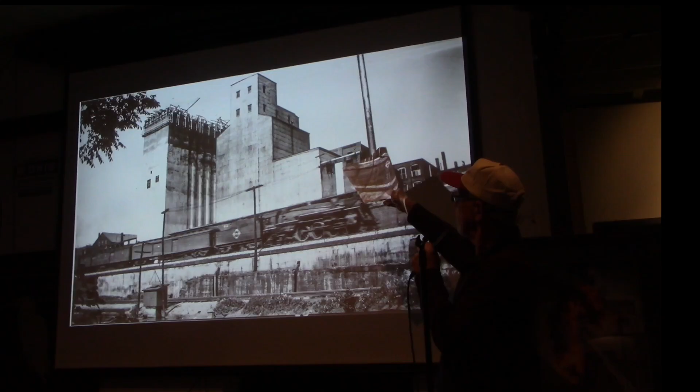Okay, so here's some historic photos. I love these photos. This is 1936. The crib elevator, the tall one over here, that was already built and added on to. That gave them 100,000 bushels of wheat storage in the crib. The concrete was built in 1936.

We have several slides of this. First I want to point out the railroad train is on the upper tracks, which was the Erie Railroad at the time, and you can see a little bit of the Erie logo right there.

Okay, so this is another one. They're still finishing that up there. You can see the cool cars. The Walters would have been over here, so I think it was there.

And there's a bowling alley. There's a big bowling alley. Oh, that's right, bowling pin alley. Yeah, that's right, that was there. That was the empty lot next to it.

And then there it is again in another phase. I just love this stuff.

So this was in 2001, I think. Star of the West had purchased us. We came up with a plan to repaint this, and the guys came in with high pressure washers, went all the way down, and we had paint chips all over the place, but they tried to plastic it all off, and they did a really nice job.

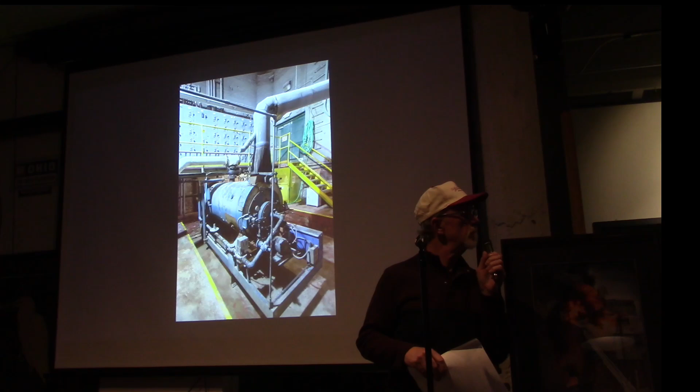Okay, this was the old boiler. This boiler was from the 20s or 30s, somewhere in there. It ran all the way up until we closed, into the 40s, yeah, we kept that thing running. The maintenance man, Darrell Bilby, was the maintenance man for a while, and he worked on it quite a bit, and Dennis Troutman towards the end kept it running until the very end when we shut the mill down in April.

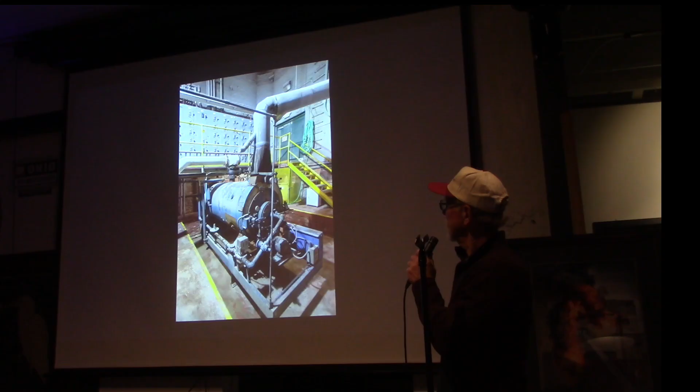Okay, we'll go to the next one. The big motor, in 1947, the steam engine was replaced.

Sorry, that just drops down on me. See, when I'm singing, I get loud. So, 1947, the steam engine was replaced with the big electric motor that powered the whole plant at the time.

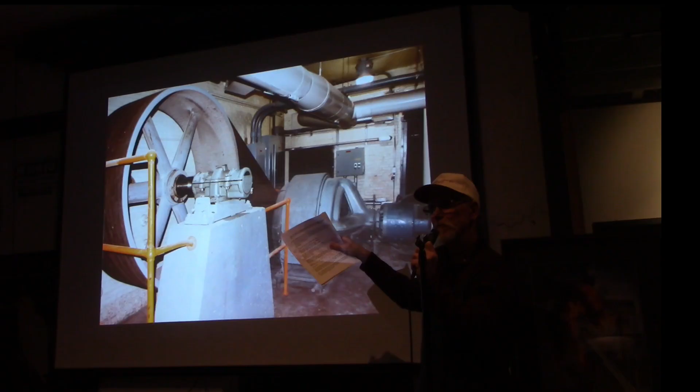Charlie Williams told me that when we started, you would start the mill up. The lights in the mill used to hang from cords, just light bulbs, really safe. So when the mill would start up, the lights would dim way down, and as the mill went, they'd flicker a little bit, then get a little brighter, and finally come up.

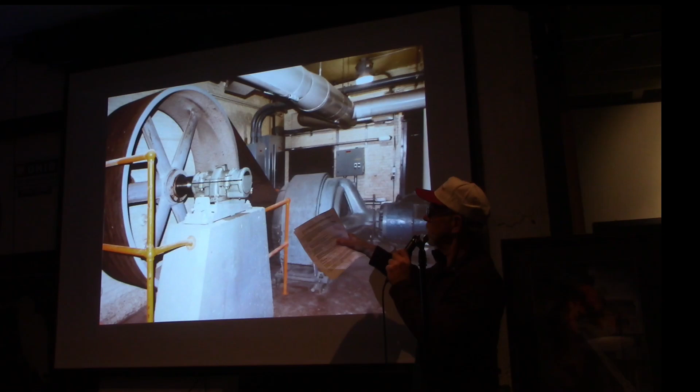Charlie Williams told me that at one time, in the wintertime, some of the guys would get a big board, or 4x4 or 6x6 or something, and they would use it to help start the mill in the winter because it was so hard to start. Now, what happened when we were there, one of those belts broke one time.

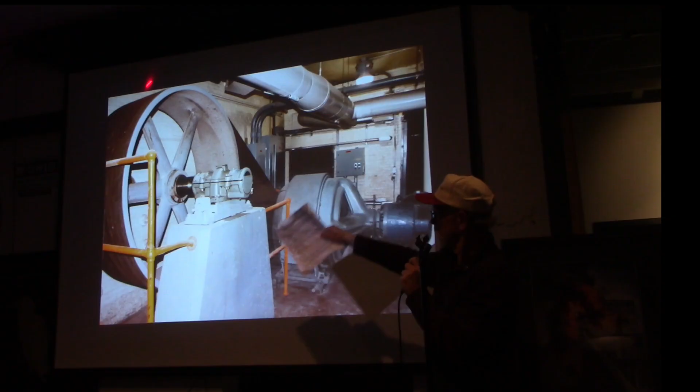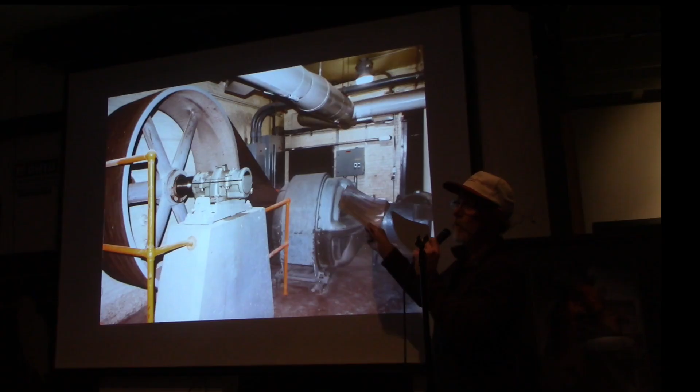There were 3 bars right there, and all 3 of them were in a V, and it pulled that right out of the wall. So after we replaced the belts, we went over all the belts and replaced them, and we put the railing back up. Guys would go up the steps like this, really quick, just in case.

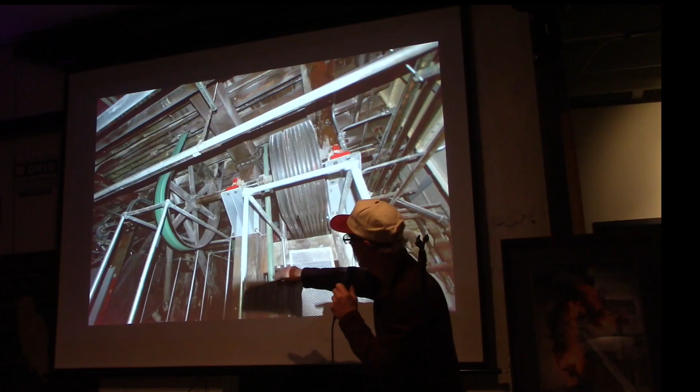This is a photo of the basement of the mill, some cool stuff, the belts. At one time there were some wooden spouts, and at one time all the spouts were wooden and lined with tin.

Good, next picture. So we're going to take you on a tour of the office and some of the interior sections. Should I move out of your way? No, sure. You guys, hi Ann!

Ann Stesney, everybody, let's give her a hand for coming. She was there for most of her life. Ann started out in the lab, and then she ended up as the office manager, and we worked together for quite a while. Yep, we worked right around there, right at the desk around the corner.

And you're in some pictures already, so. And Lou Lawson worked there for most of his life too.

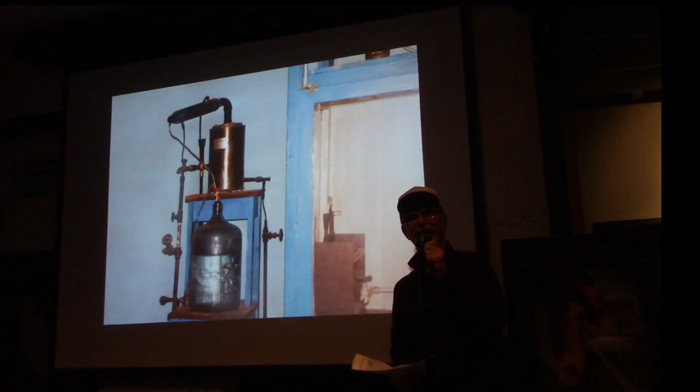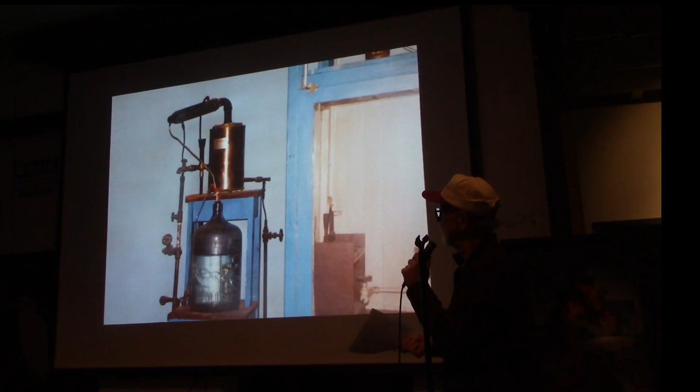Aha, the still. I always wanted to put some corn in there, but they wouldn't let me. We had this still forever. A lot of the tests in the early days used distilled water. All of our forklifts were battery-powered, and we would fill the batteries with that distilled water. That's still in the building.

You can see this pole right here, and the handle up on top. If you missed the step, or were asleep or something and didn't grab it, you could pull that handle, or hit that, and you wouldn't go over the top. Safety first. Okay, next, this is the one in the mill, and it had a similar setup, though it wasn't quite as daunting as the last one.

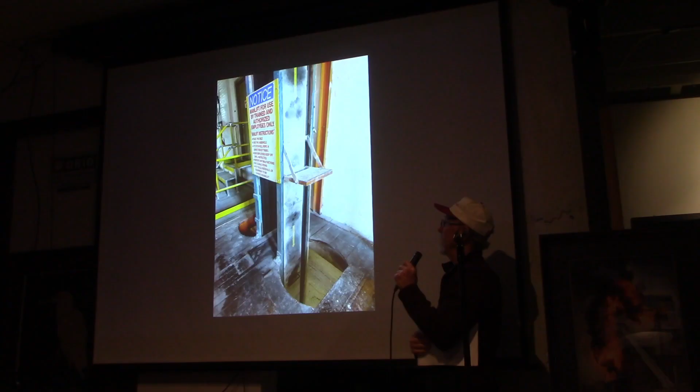The reason they put the cupped handles on was because at one time, at the mill, I don't remember what year, the night watchman had no lights on and was going up the other floor. As it came up, you'd have a handle, then a step, then a handle, no step, and it was down. The guy had his hand out like this, felt the handle, it was round, he jumped on, and they found him at the bottom the next morning. That was a horrible thing.

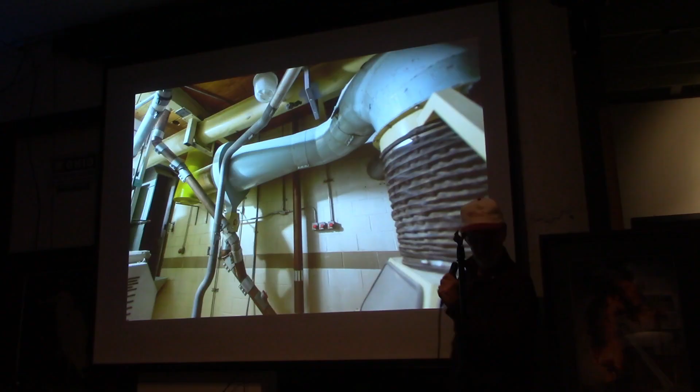So this is part of the cleaning house. Brad took this picture because of the design, I think. Yeah, going through the mill, I just found the appointments, the tubing, and everything so graphic and artistic, with different colors.

There was a movie years ago about a person that shrunk down to the size of a blood corpuscle, I forget the name, and you took a tour through the person's body that way. In the mill, I felt like that little person, because the mill looked like I was in a living being with all these tubes and stuff.

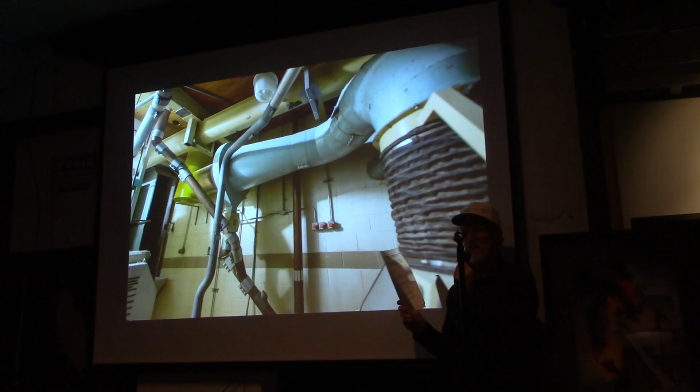The 60s was really good for Brad. Black lights, 4 foot long black lights.

Really good grain mills. The interesting thing about this cleaning house was the old cleaning house was in the crib, and it was old. We were always digging stuff out. So this part of the building was in between the back of the mill proper and the crib elevator.

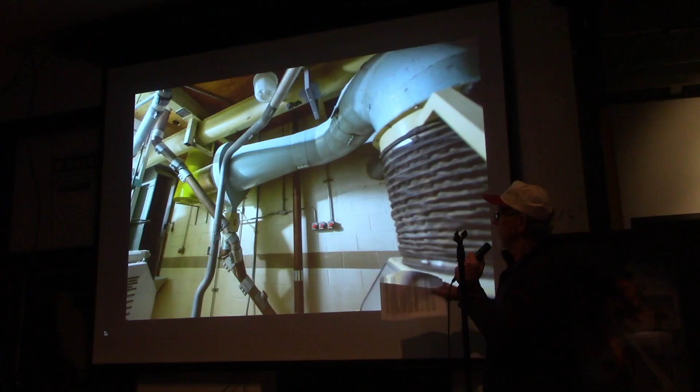So we built this wall. Ronnie Stamm and Stamm Construction did a monster job. They built this up, put in the flooring, and put all of this equipment over here.

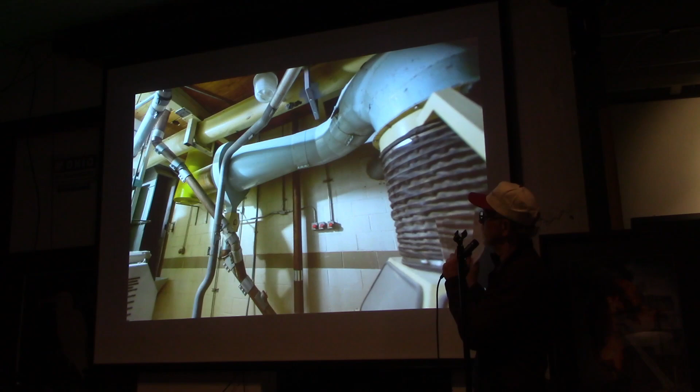Beer break. Are you in the flour stage now or the wheat stage? This is in the cleaning side of the wheat. Wheat stage, yeah, the cleaning side of the wheat.

Let's go to the next one. Okay, this is part of the cleaning house, just kind of a cool picture. These are air filters. Let's do one more, okay, just before beer, we'll get really thirsty on this.

So these were the roll stands when I first started. Were these in when you first started, Lou? No, they were already out. Okay, so these were the roll stands.

Inside the roll stand were glass doors, glass windows on them, and shaker tables. They were made of wood but had a tin covering over them, and were hanging from cables. Yep, Mike, they were hanging from cables, and they would shimmy like this. There was an eccentric bearing inside there, and they would shake like this.

On all of the roll stands at the time, and even still at the end of the run, on the line shafts, they were Babbitt bearings. Inside of the cast iron casing, we would pour them. When these Babbitt would go bad and the bearing would heat up, a couple of times on the roll stands, Roscoe Pownell, the old miller who was there for 55 plus years, would send us down.

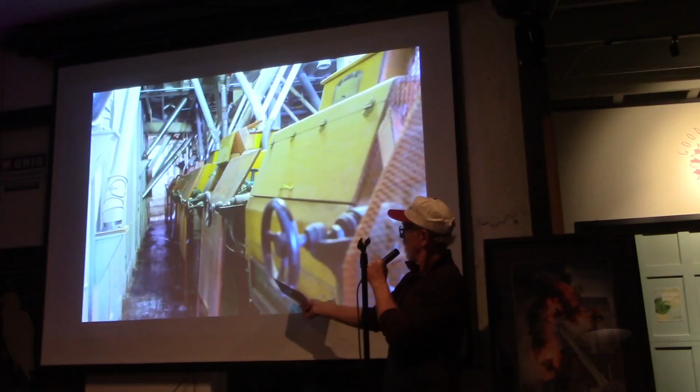So in the mid-'80s, we did a conversion. The bases of the roll stands stayed the same - those were Allis-Chalmers. And we brought these in, which are on roller bearings. It increased our efficiencies quite a bit, and it really turned out to be a nice job.

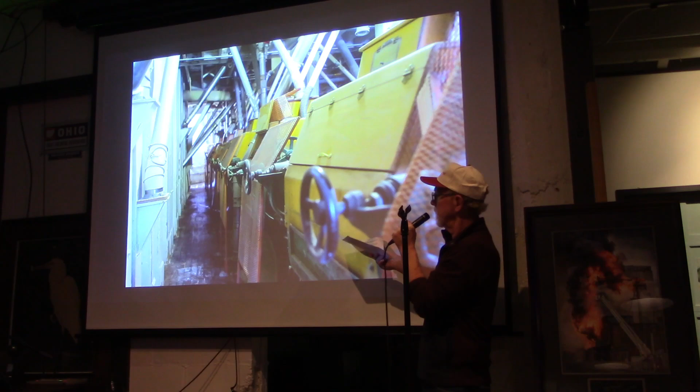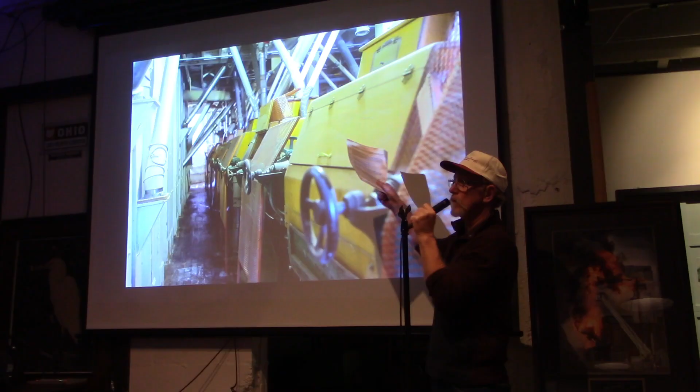Is that natural light coming down from above? Probably not, it was a mix - a lot of it is natural and artificial light. At this point, I think we had gotten rid of the tethered light bulbs, so there might have been LEDs at that point.

This is cool because you'll see later we took out the old sifters that were in there from the 1920s to the 1940s. We had these refurbished in our Ligonier, Indiana plant, and it took quite a few days to get this job done, but they were running.

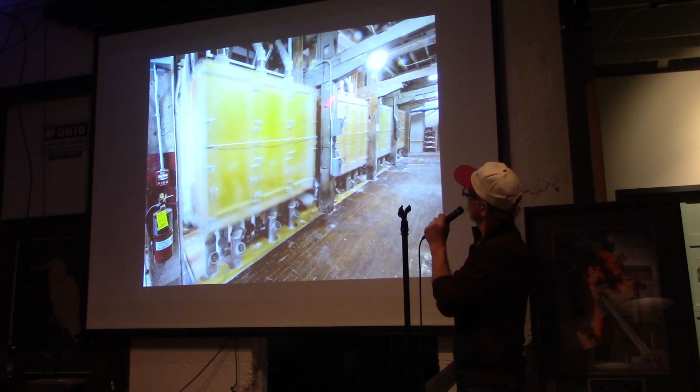Notice too, these beams are really big. What age would these be - 1890s? Those were 1890s, 1880s. These were original, we didn't take them out.

Some of the beams, if you look real close, you can see that they would bore a hole, and they weren't bolted together - they had a wooden peg. Yeah, all that was wooden peg.

Down at the bottom of the crib, under the bottom, where I'll show you a trash compactor soon, the beams up there were starting to crush down, so we had Ronnie Stom's crew come in and put up steel reinforcement.

Brad always came at the right time.

This was on occasion. Now you can see these are all aluminum pipe, and those were all wooden before. Behind them, these stands are the elevator legs, so inside of that is a belt with cups on it, and that brings the flour or the stock up and puts it to its respective place.

So we cleaned up a lot of that back in the day, didn't we, Lou? Yeah, yeah. And it was usually when it was 90 degrees outside and 105 in the mill.

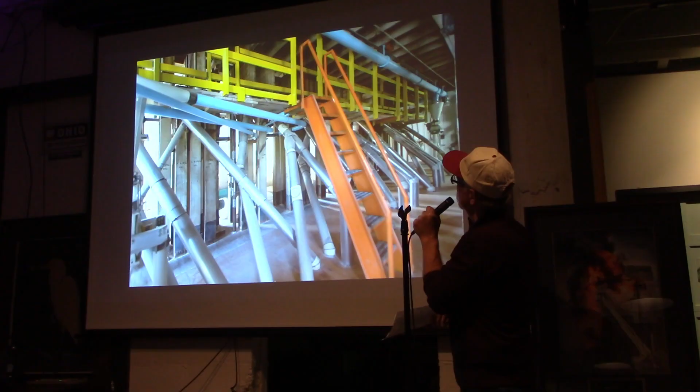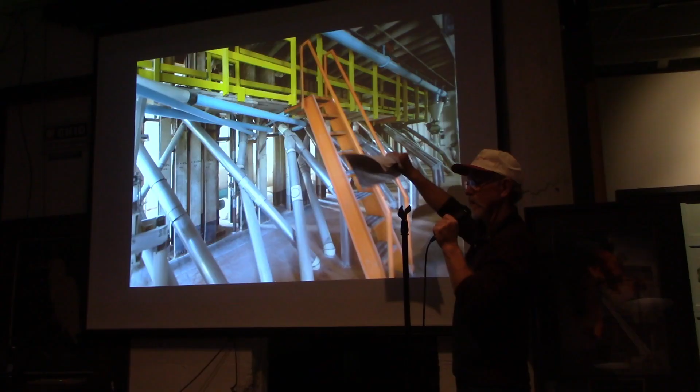This is up in the attic, or the 4th floor. The attic was called the attic because in the first pictures you saw, there was a hip roof in there with one window, and they called that the attic. After they added the 4th floor, the attic name stayed.

Those are another picture of the new sifters - this was the finished sifter. This little buddy handled all of the flour that was milled before it went into the storage bins. All of the flour before it goes into the storage bins goes through a sifter and a magnet, and it goes into the storage bin.

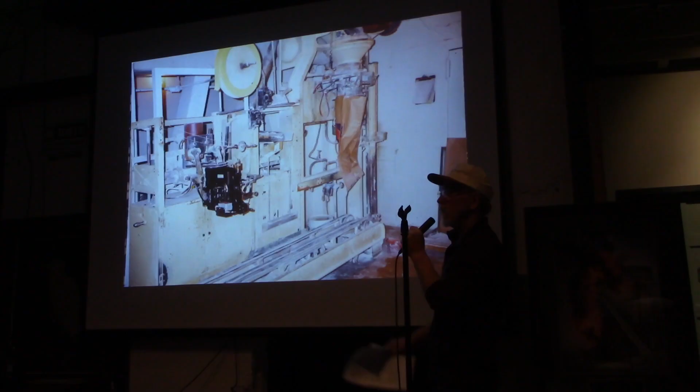Then coming out of the storage bins, it goes through a sifter and a magnet and goes into either a bulk truck, the bagging, or rail cars. Why is the magnet needed? Any kind of foreign metal, and there's a lot in the screws - the screws are metal, so you want to get rid of everything.

And so this was the original packer - this is a Bemis packer, and here are the Bemis hats that you used to get. They also supplied us in the early days with bags.

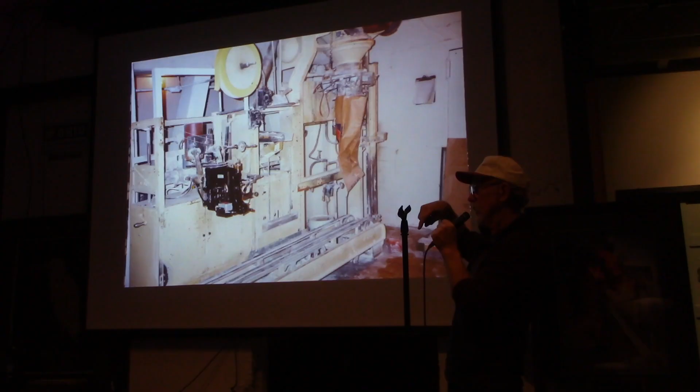What's the time frame of the flow there, through the mill - hours, days, from start to finish? To this point, from start to finish, it would be about 15 minutes. If it was... right? Impressive.

Tempering stuff would stretch out to hours. But just the grinding, from grinding, it was about 15 minutes to finished flour.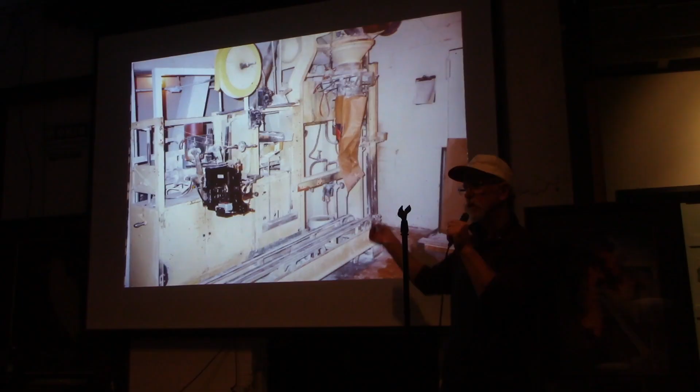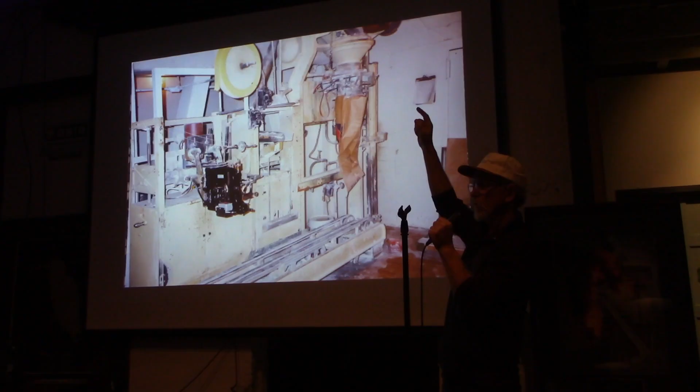It's moving through there. Everything that came through the mill would go to first break, down to the basement, up to the 4th floor, drop down through another sifter, or those other parts would go to their respective sifters. Goes back down, goes back up, goes back down, all the way to finished product.

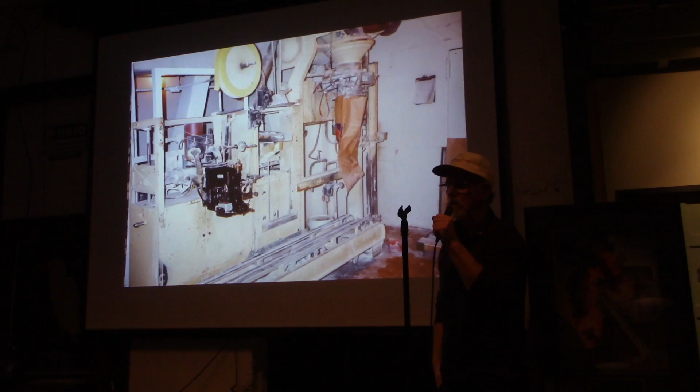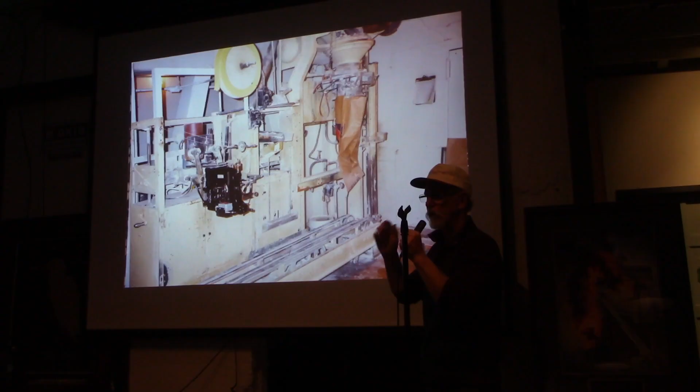Did it work 24 hours? Didn't when I first started. I was palletizing one time, and the bags were coming off of here, and we threw them off our shoulder and palletized them. We even hand wrapped them with a roll of stretch film in the early days.

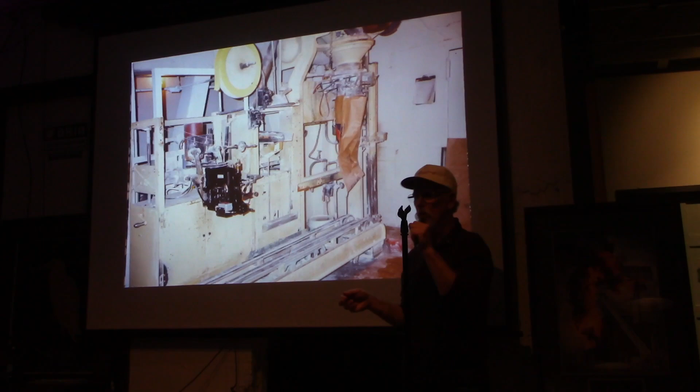Anyway, it was down, and the mill was picking up production. Pete had sold to Pepperidge Farms, and Sugar Cake Cookie was kicking our butt, so we were staying longer and longer. One day I was there, and he came down. I had just bought my Triumph motorcycle, a 650 Tiger, single carb with a lot of chrome.

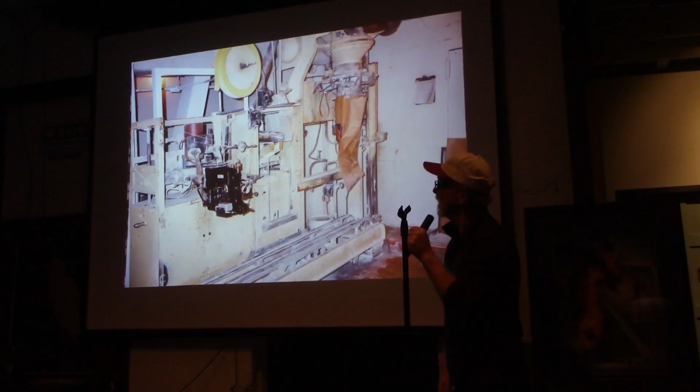He came down and said, 'Do you think you could stay for a couple more hours?' I said, we're just getting behind, we're getting behind, and it kept getting longer and longer. I said, 'Yeah, I got a bike payment, I'll stick around.' So yeah, we ended up running 7 days a week, 24 hours.

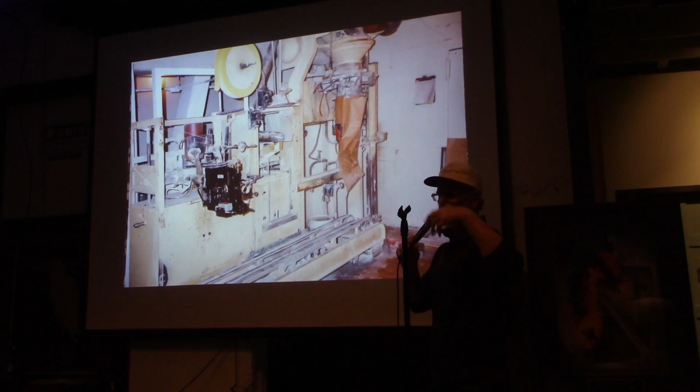At one point we were buying flour to cover some of our accounts and bringing it in, reprocessing it, blending it in with our flour just to cover accounts.

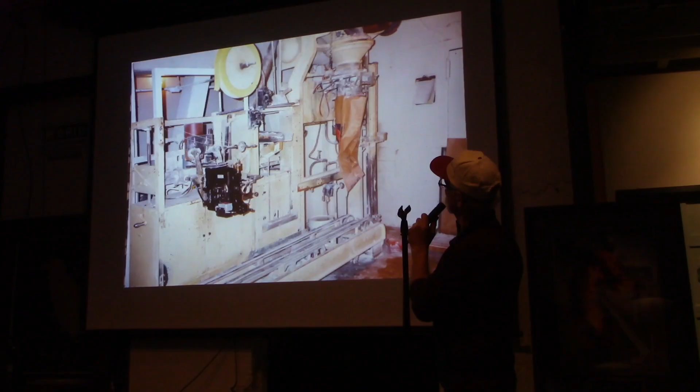So up on the top there is a bearing, and that's one of the bearings that was a Babbitt. There's a pan underneath it because they had an oiler, you had to oil them. Inside that Babbitt bearing, when we would pour those, we had Babbitt tools, real sharp, knife-like things. You would pull the Babbitt and make it nice and smooth. Then we'd take a Dremel or another tool and put an oil groove through that, so on the top and the bottom of that Babbitt bearing, when the oil hit and the shaft was turning, the oil would go back and forth and lubricate that bearing.

And they still use Babbitt in bearings today. It's a big user these days.

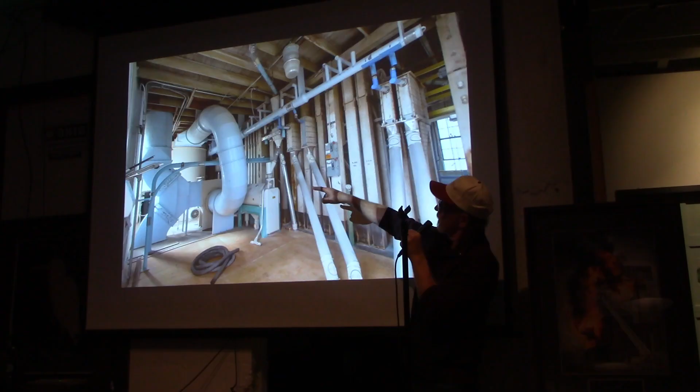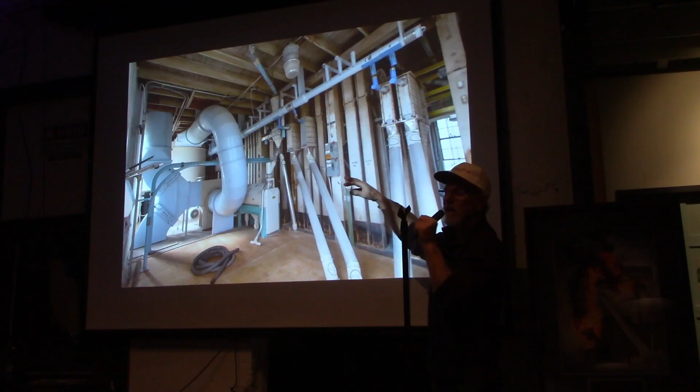And they're a lot bigger. They're a lot bigger than they look in the pictures. They are, they're huge. Yay, Brad. Next, good job.

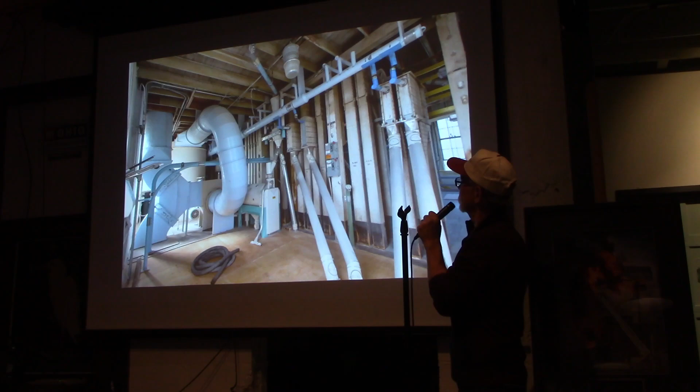Okay, at one time these are purifiers, and they're a type of sifter. They classify by particle size. Inside of them is a table that's slanted, and it's kind of shaken. It's got a screen on it. Underneath, there's a brush that goes back and forth, and they have these grooves in this thing, and this brush would go back and forth and knock the throughs off of the screen.

So they had 7 of these in the beginning. They went down to, we had 3 at the end, because we had added some other sifters and some other machinery that was more efficient. Next, back in the cleaning house again.

Tubes. Yep, my favorite, lots of tube pictures.

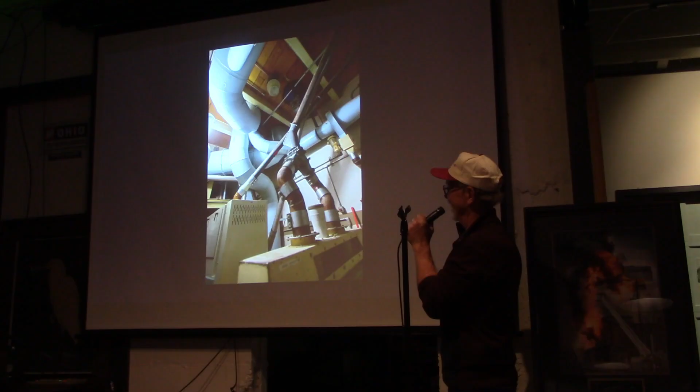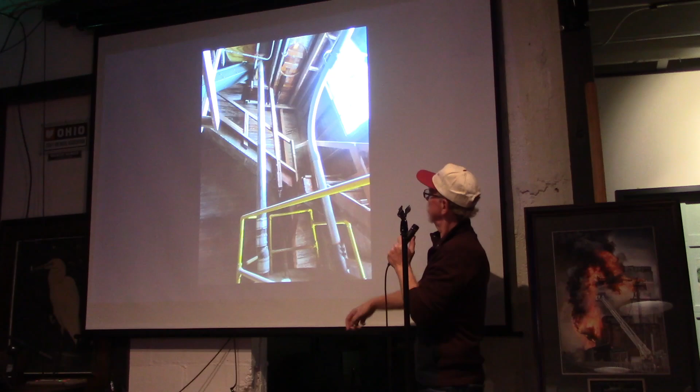Okay, this is in the crib. So down here was the packing bin, so we loaded flour into the packing bin. Down below it, on the first floor, was that packer, the Bemis packer that we packed out of. So you could go up all these steps, and it goes all the way up to the top. On most of the levels in the early '80s, when I was there, had big crocks. They were about 50-gallon crocks, 40-gallon crocks, and they were huge.

And the crocks, they had salt water in them in the old days. On top of the crocks were these red boards to keep the dust out. On top of those were pointy buckets, so that if they did have a fire up there, you'd grab a bucket and start throwing water on it before the fire. Because a lot of times in mills back in the day, they didn't really have the fire extinguishing that they needed.

Did this all burn in the 2022 fire? Oh yeah, this was that whole building. So all of what we've been looking at is gone, is that right? Correct, in this part, just in this part. It didn't affect the mill proper. I mean, there were some windows blown out, but it didn't burn anything terribly in the mill proper side. Just the crib, the crib elevator. And the crib elevator, well, we'll show pictures of that soon.

And the reason I took a lot of these pictures is just because of the really old wood. And it's really original, it's interesting to see really old wood still holding up, and you're able to walk on it. You just don't get that experience anymore, 100, 130-year-old wood.

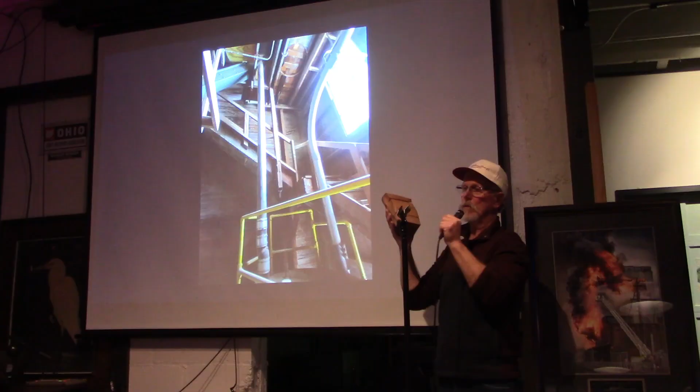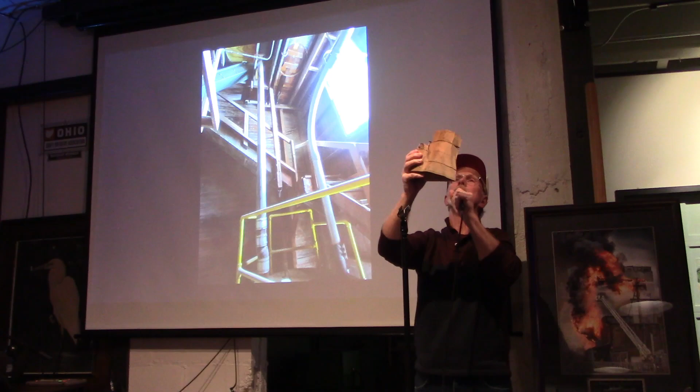Oh yeah, explain some of the grooves in these things. Okay, so the crib elevator was built with 2x10s laid flat, all the way up to the top of the bins, and then they went with siding on that. So I don't know if you can see it from the back, but this is rounded off, it's very smooth, there's no splinters. You could rub it on your soft cheeks and not get a splinter. But there's a nail in there, and it's this long, about 8 inches, 6 or 7 inches. So that's what that was made of.

And some of these, like I said, the elevators in the old days and the conveyors were made of wood. This is what happened in the mixing leg down under the crib. So the wheat hits that, and you can see where the grain is tough there and more sturdy, and it makes waves in there like sand, just from the grain moving over the wood for years. This used to be a 2x10. Oh my God.

Cool, huh? Where do the splinters go in the process? They probably are just extra protein. No, those would get sifted out. Of course, this is on the grain side of it, so that's a whole process of elimination there. And again, the little knots in the wood, you've got little bubbles in there, and you guys can come up and see this later if you want.

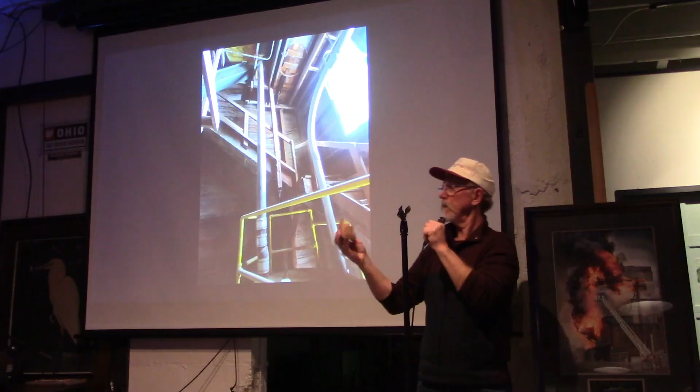What kind of wood is it? I think most of this is pine. I don't know, can you tell? Not oak, I don't think it's oak. No, it's not, it's not oak. I think it's pine. So the moving grain over the wood causes a slow wearing away of the wood. It'll do that to a line shaft too.

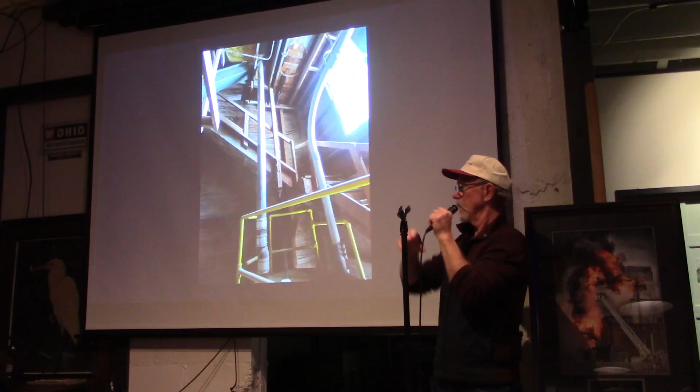If you get grit in the line shaft... I wish I had that line shaft from the 4th floor. I left it in Willard. Anyway, so I just wanted to show you that, it gives you kind of an example of what was happening in there. So this is again in the crib elevator. All this stuff melted in the fires.

Okay, here's the side of the crib elevator. Oh, it moves, it's like in the old days on the 3rd shift. So you can see the boards in here, and they notched out. There used to be a floor in here, but down on that side was a door that you could get in, and those were all flat bottom bins. At times we had to crawl in there and shovel those bins out, because the wheat would only come out through one 4-inch or 6-inch hole in the floor, so you'd get in there, shovel your butt off, get it emptied out completely, sweep it out, and go to the next one and sweep it out. Remember, Lou?

Oh yeah. So could you explain the construction of the wall here? Yes, the 2x10s laid flat, and then when they get into the corners, I guess there's no corner here, but they kind of bird nest, what do you call it, bird beak, and they would go like this to tie those in.

They would stagger them - stagger, I like that word. But the interesting part is each slat was about 2 inches thick on the wall - the boards, about 2 inches thick, but 10 inches wide. So the wall is 10 inches deep of solid wood, mainly because it had to hold up a lot of weight from the machinery. Now there's a spot under the crib we haven't gotten to yet where there was a little bit of wheat leaking.

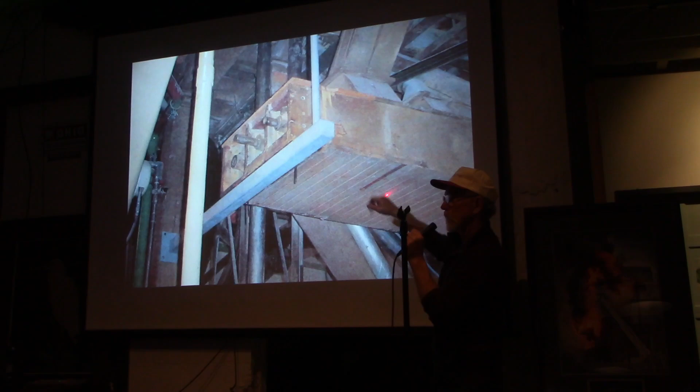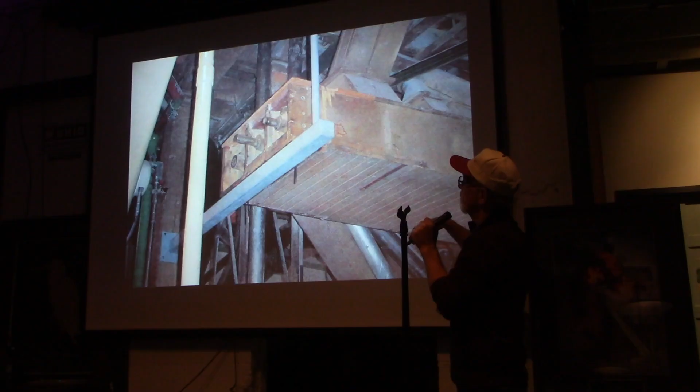Do they use vacuums? Vacuum suction? Oh, you mean pneumatics? Yeah, there's a lot of pneumatics in new mills. In this mill, even in the pneumatic mills, you still have screw conveyors and drag conveyors - but they're not wood, they're not wood boxes.

So we tore those out, and this spout is going up there because they're not done yet. In the old conveyor there's a lot of space in between, and there's no drop bottom in them, so the only time you were able to clean them was when the mill shut down. When you're running 7 days a week, you don't get in there and vacuum, so they were an infestation problem from the get-go.

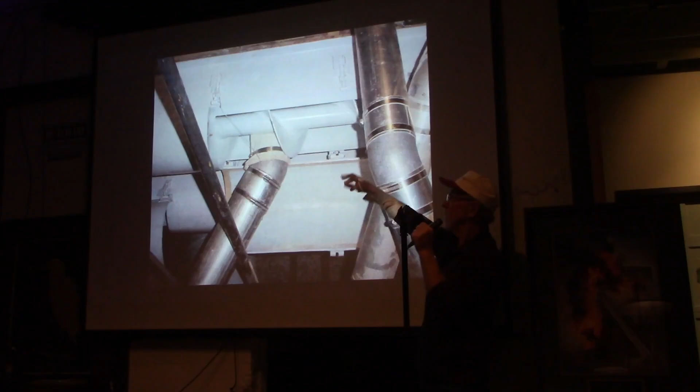These are close tolerance, and this door comes up right on that screw. So this is the screw, right? Right, that pulls the flour or grain through this big tube. Right, and this was taken out and moved out of the way, and so was this, so you could close that. Okay, the dungeon, the basement.

We stored a lot of shafts and pulleys down here because they would break. Some of the big ones were split in half, so you could put it up, chain fall it up, and then put the second half on and bolt them together.

These pulleys are different sizes because in different parts of the mill there's a power takeoff that runs the whole length of the building, used to. So depending on the stock going through it, you had different sizes for the RPM. Sometimes you'd need a really big pulley because it had to turn the machinery fast, and sometimes you would use a very small pulley if you needed power that would turn the thing slowly.

Can you tell he's got an engineering background?

And it's so clean, all the floors are so - it was pretty clean. I mean, for an old mill like that, we passed our third-party audits over and over again, and it was all wood.

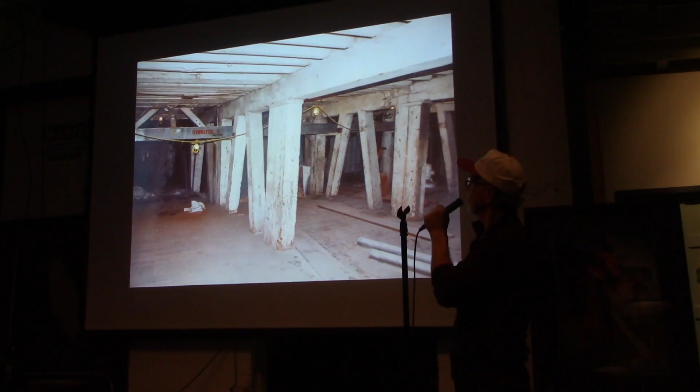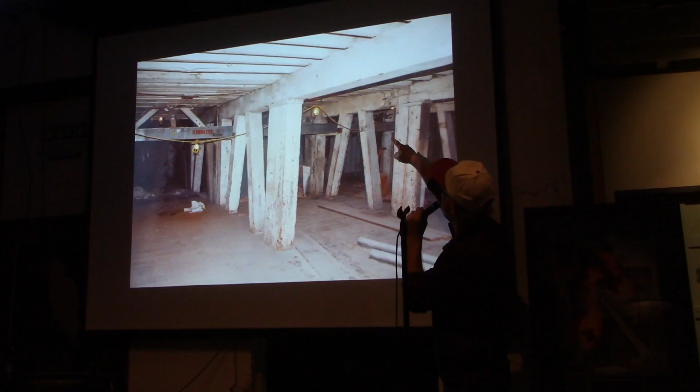This is all wood. And they ended up putting some metal in here, but you can't quite see it. In some of these beams going in, they were cut up into it, and a little bit of support, the supports were in there.

Well, first, these beams, I wish there was a person standing in here. When I went down here, these beams are unbelievably large. I can't tell you, 12 by 15 or something. Yeah, that's about right. And you see the little fire extinguisher there, which is actually about this big.

Were you afraid? How long had that building been there? The cool part was when I took him down there, a train went by. Oh, gee. And you could feel and hear it, just a low rumble like. Yeah, it wasn't the sound you'd normally hear. No, it was like, this deep. Was anybody around when the trains derailed with the coal in them and hit the bridge? That was like... it wasn't a big bang, it was just a loud growl like that, and that's similar to what was there.

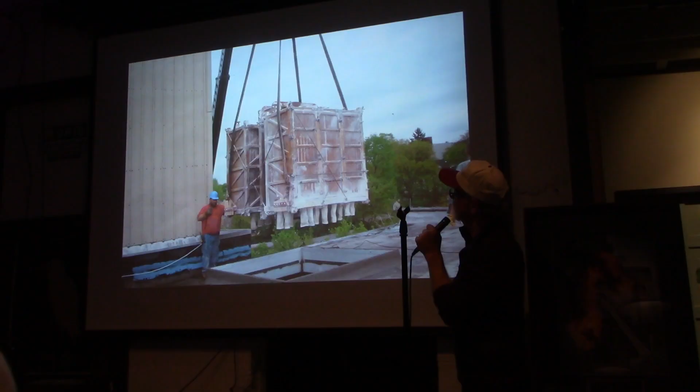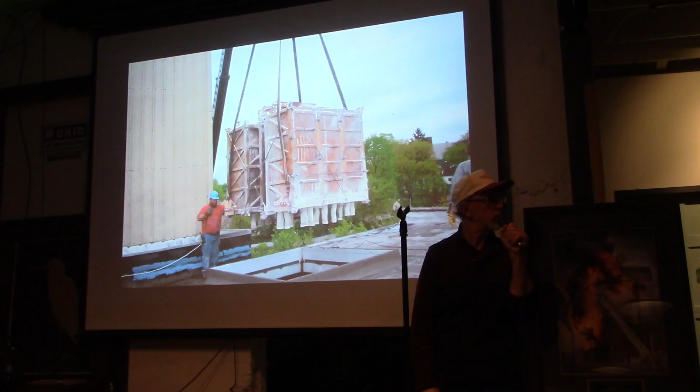Okay, this was 2008 when we pulled out these sifters. These sifters were anywhere between the 1920s to, I think the last one was the E-sifter, put in 1942, wasn't it? Yeah, it was pretty young still. Yeah, they paid for themselves a couple of times.

So there's the new ones that were reconditioned. Look, I'm standing on the roof going, why in the hell am I standing on this roof? So we were helping, we had the road blocked and everything. Keep going, look how tall that crane is, pulling these sifters out of the building.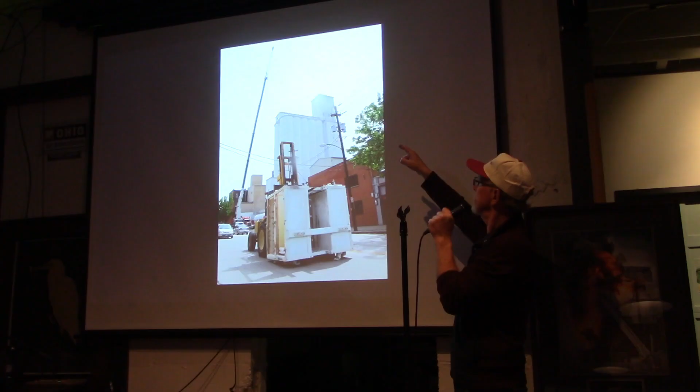I think it was 230 because the head house was 165, I think, from the sidewalk. Okay, next one, another sifter. Look, I'm helping.

I wasn't just your regular manager. I got out there, worked.

And I thought, how good does it get? I love this industry. It's nice to be the boss. I guess it wasn't me, it would have been Mr. Michael or Red, but no, Mr. Williams. And I just like the photo.

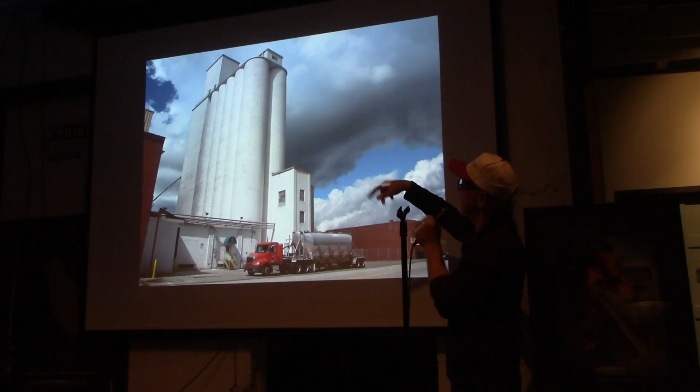All right, so this was after the silos were painted. That was a Food Liner trailer. They helped when we were short on trailers, and we used to use them to run loads. You can kind of see the Star of the West logo on the awning. Is that inbound freight or outbound freight? It could have been either, because we used them for delivering to Pepperidge, and we also used them for bringing flour in.

Did you? She's a good gal. So Jermaine was very pleased with that. Who's she? Jermaine was Charles's wife, Charles II.

That was 2009. And also that same day, I don't have a picture of it, but Ron Dawson had made pictures and framed them of the different varieties of flour and the Star of the West and Williams Brothers, and he gave that to her as well.

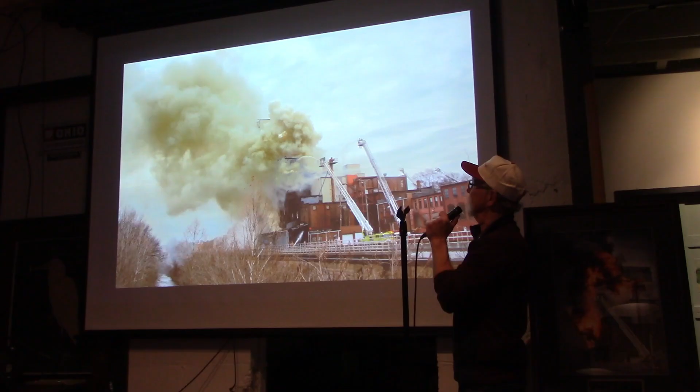But yeah, they never figured out, and they never will figure out how it started. There are so many different angles that could do it. It was empty, all of the wheat was empty. Fortunately they got it under control well enough where it didn't spread to any of the other buildings, and they didn't have any explosion, except for the one where they opened a door from one side into I think the old cleaning house. That's when that ball of flame went through the 4th floor and blew the wall out. It also twisted the building enough that it blew the windows out in my office.

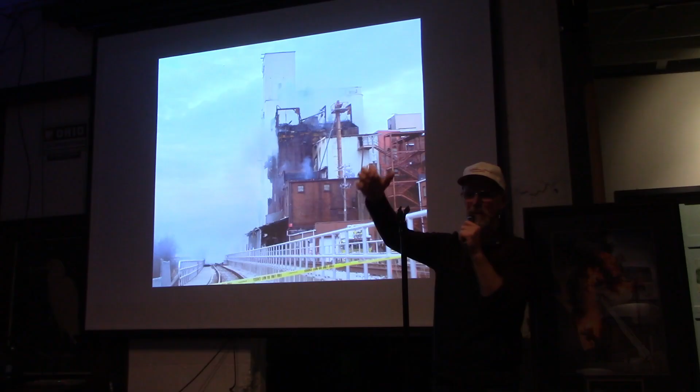But I talked to the fire inspector, and he said there were papers on the desk that you used to sit on, they never moved. So it wasn't the explosion that did it. The flame was up on the 4th floor, and he said it was just like we would burn wood for art, it was just scorched a little bit, but nothing was caught on fire.

So it blew out the side of the building, and oh boy, the bricks ended up partially on the car. Yeah, that's how far it blew it out. More smoke. And just amazing.

This was the concern of Howard Boyle - that was always his concern, and ours as well. This showed what the citizens and the ex-employees were feeling that day. I talked to him recently, and he said they were so worried about it catching the bank and other buildings on the block on fire, but the wind was blowing from the southeast, which took the smoke and flame out towards the river - a godsend. Wind from the southeast isn't common in these parts.

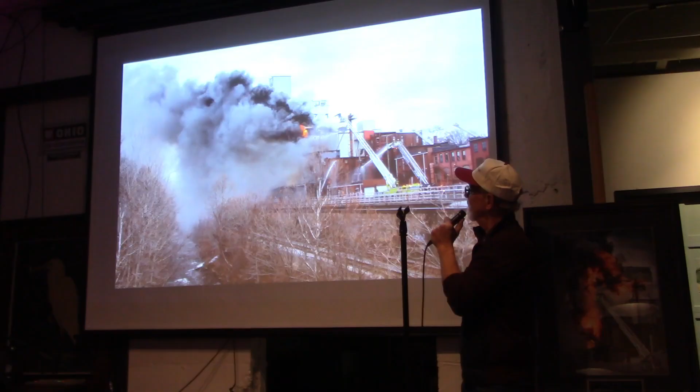So yeah, it just keeps coming back, doesn't it? It's going. Blown out walls - that is where the fire took place, the first one back because it went into that room.

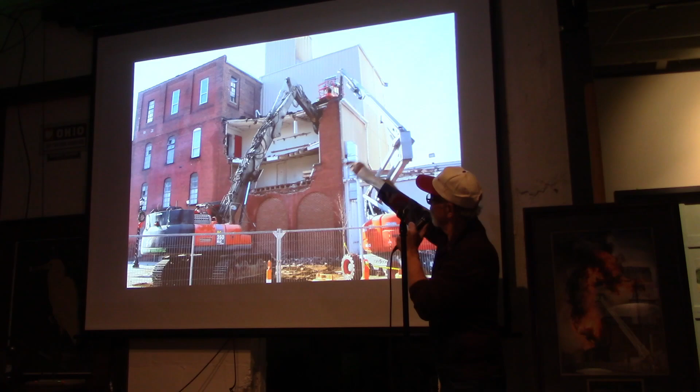There were no injuries. Were all the chlorine cylinders out? I think the guys that opened that door were pushed up against the wall by the force, but they weren't hurt. They were damn lucky they didn't have an explosion come through there.

This was many days later, and they were still cleaning up a lot of the rubble. I was there - I think it was over a week later, and it was still smoldering because I talked with a couple of the firemen as well.

I wanted to put this in because it had the Williams Brothers logo and the gate there. In the summertime we'd have the gate closed and locked, and people would still come in. We had a guy crawl over it one time, and we found him riding a man lift with one of Freddie Smith's toolboxes in his hand. It was pretty funny - well, it wasn't funny then, but.